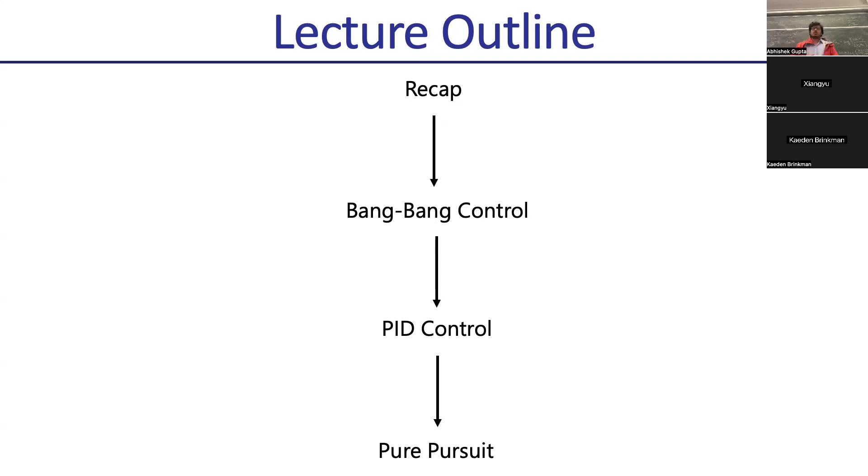Okay, so today, the way we're going to structure our class: we're going to recap a little bit on what feedback control is. We're going to study this paradigm called bang-bang control, then we're going to do PID control, and then we're going to touch on a method called pure pursuit, or we'll see how far we get. The idea is to instantiate a lot of the more abstract concepts we discussed last time in methods you might actually implement. Let's start by recapping what we talked about.

So we talked about this sense, plan, act paradigm. In control, we're going to assume that you know where the robot is, so you've done state estimation or Bayesian filtering to figure out where the robot is. You're going to assume that a planner is going to tell you a rough sequence of waypoints or a trajectory that you want to follow. Control is going to follow those waypoints in the presence of stochasticity, or not.

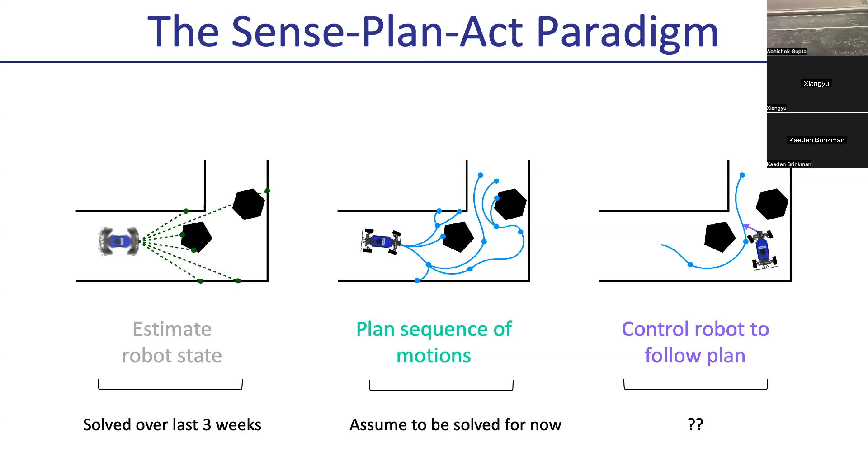The piece of the puzzle we talked about is: assuming you know where you are and you know where you want to go in the long term, how do you actually go there? How do you find the actions to go there in the presence of noise and the presence of complicated models of the world? That's the problem of control we're going to think about.

Specifically, we talked about feedback control, and we talked about how when you run open loop trajectories, you can have compounding error. You can drift from the path that you desired because the models are wrong, and you have unmodeled effects in the environment.

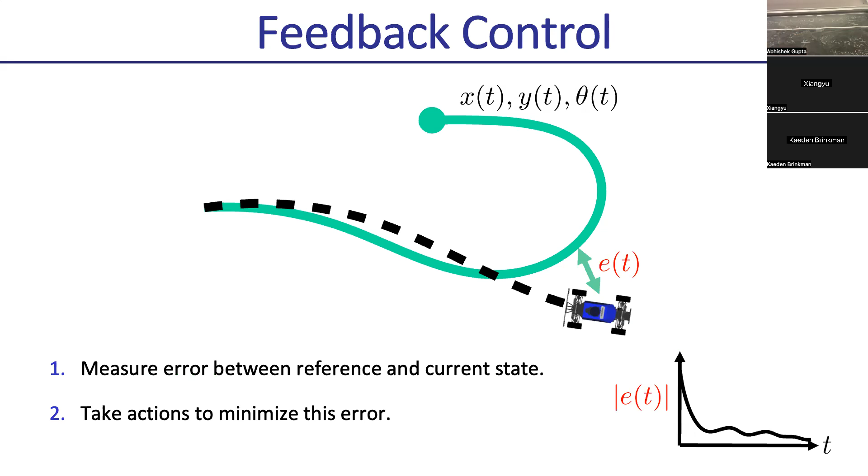So you typically want to measure the error between your robot and your desired position and try to minimize that error. We talked about how we can choose things like reference states on the trajectory that you want to get back to, computing error to the reference state.

Then we discussed how we can instantiate the control problem as trying to take your current position, the error to where you want to go to, and trying to figure out what actions to take on the system. For instance, for a race car, your action might be the steering angle or the velocity, and that's going to help you correct for these errors in closed loop.

So the steps of doing feedback control are: first, get a reference path or trajectory from planning. Then, once you're executing things in real time, pick a reference state from the trajectory where you want to get back to, given where you are right now.

Try to compute the difference between where you are and where you want to go to, and then compute what we call a control law given your current state and where you want to go. You start with step one, and then you repeat steps 2, 3, 4 in a loop while you're still trying to accomplish your task. Make sense?

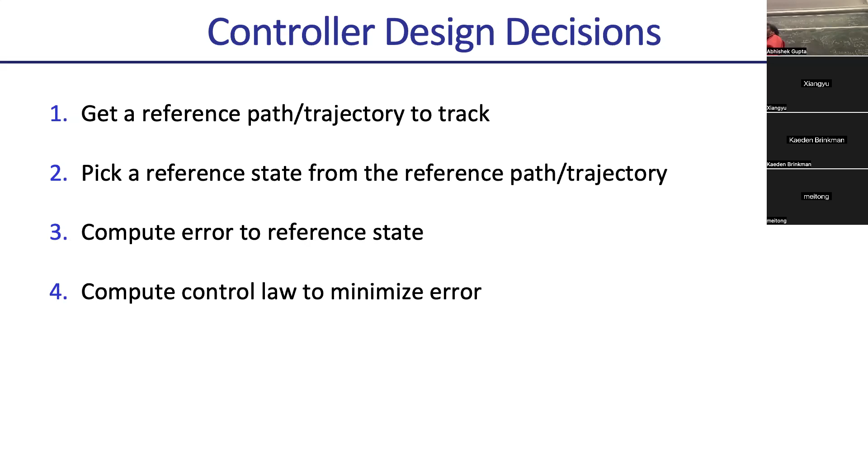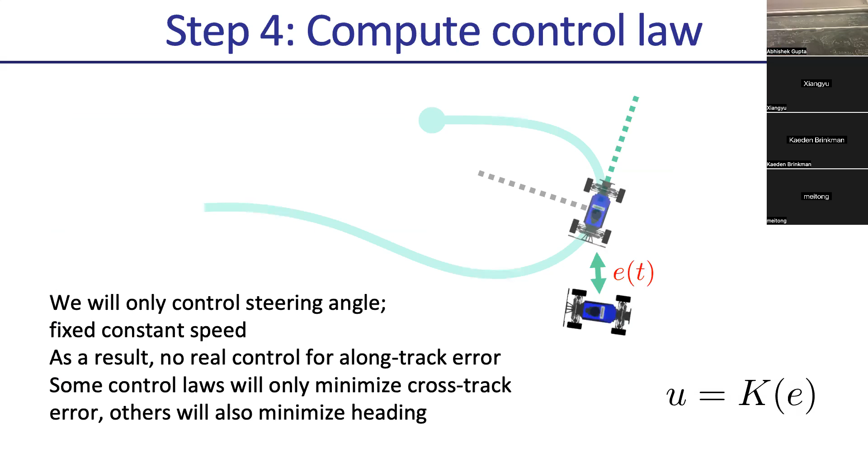Okay, so we talked about how we can instantiate this error in some frame of reference, so we can get into the right frame of reference. But the important bit we're going to discuss today is: how do we compute control laws? Given your current state and your error to your desired state, how do you decide what control or what action to take?

The choice of action is up to you as the designer of your system. It can be a speed, an acceleration, whatever you would like. But in pretty much most of these cases, we're going to try and design what this function K is going to be, which takes in your state, takes in your error, and gives you control. So the discussion today is just going to be on designing a rule for the state, which takes in a state, takes in an error, and decides the control. That's it.

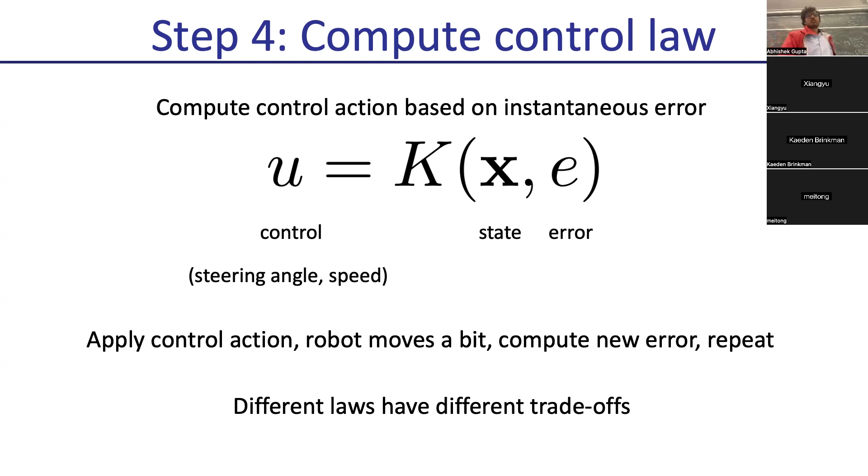We're going to cover 3 different methods today. We'll cover a much more complicated method on Wednesday. But each of these methods have different trade-offs, so don't blindly follow one versus the other. So specifically, we're going to cover these types of methods. Bang-bang control is silly, so I haven't included it here, but PID control and pure pursuit is what we'll cover today. Next class we'll cover LQR, and the class after that, MPC. But they're all just different ways to instantiate this general formula of taking your state and your error and producing a control. They're all just different cases.

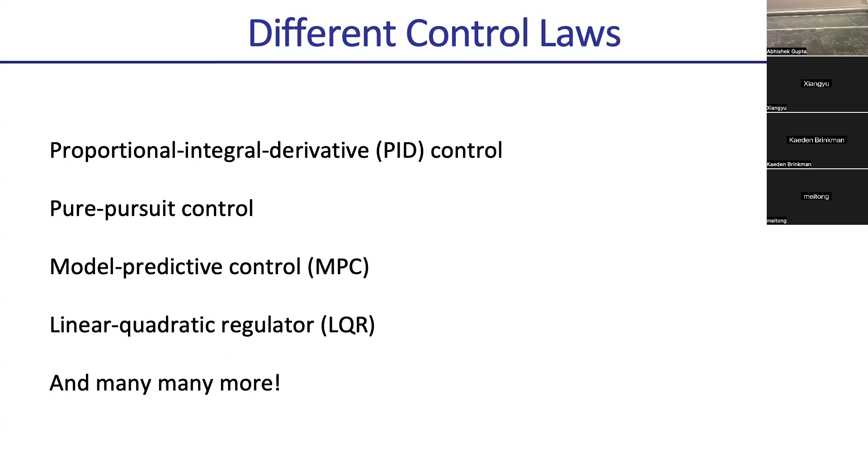Everyone on the same page for what we want to do with it? Great. Okay, so let's start by thinking about bang-bang control. Let's say we're doing path following and you computed the error and the reference path like we talked about last time. What is the stupidest possible thing you can do? You're following a path and you drifted off the path, and let's say the control is just steering and you're just choosing a steering. What is the silliest thing? Steer backwards, steer back towards the path.

That's all that bang-bang control is. It's just saying that you choose between hard left and hard right. So if you're to the left, then you go right, and if you're to the right, then you go left. Essentially, the reason it's called bang-bang is because you choose actions at the limits of your action range. So your control profile is: if your error is high positive, your control law is going to be the maximum negative. And if your error is high negative, then your control law is going to be high positive. So you just go bang between the two ends of your spectrum, and the control law is just going to be like that. It's the silliest possible K that you could have.

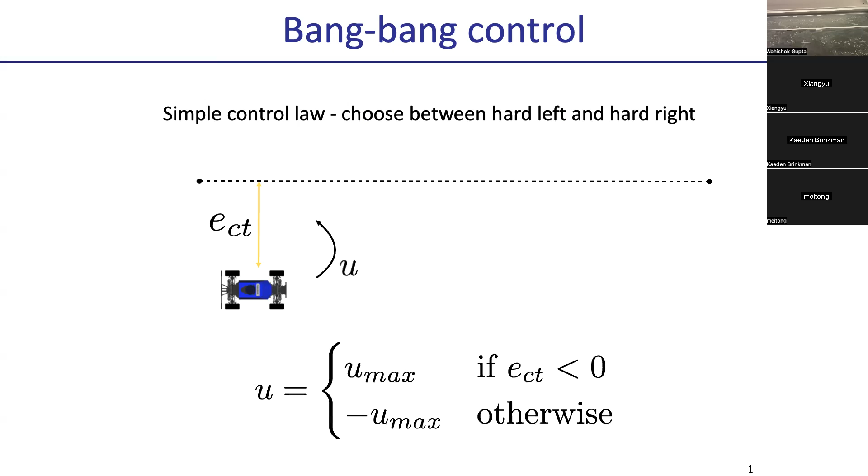Okay, so this seems dumb. So in what situations might this be good? Like when might you want to use this? If you're going right at something - right, but even then you might have drift. So imagine you're going right at something, you drifted off, and now you're aligned. If something comes in front of you - right, yeah, that could be one.

Another is if your system is relatively able to correct pretty fast in the loop, then it's going to be fine. But if you're going pretty slow, you'll drift off too far and then come back, and then you have like a kind of winding thing. So when you're doing high frequency control, it's okay, but if you're doing low frequency control, that's kind of a problem.

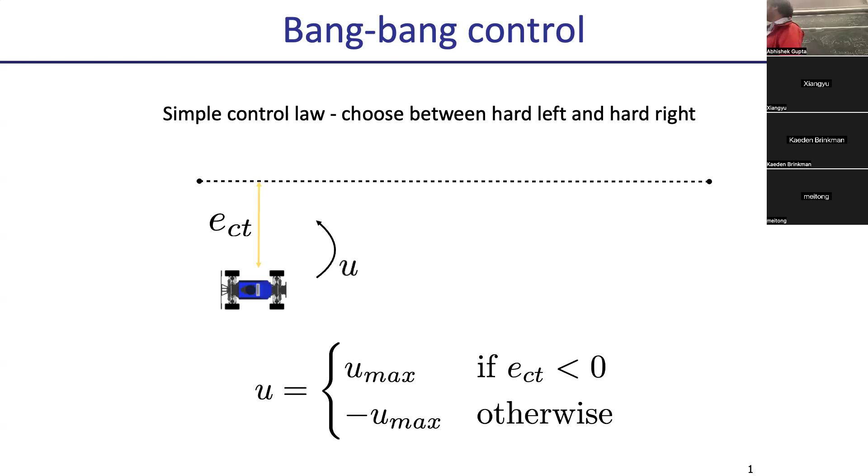But if you're doing high frequency control and you're doing bang, what could happen to your system? Physically, you have a physical system and you're doing bang control - why might that not be a great idea? Yeah, you're constantly flipping your motors one way versus the other, and that might damage your hardware. So generally, bang control is a bad idea, and more formally, you can show that these bang controllers are not necessarily guaranteed to ever converge. Basically, you've gone too far, and then you apply control and you go too far this way, and you apply control and you go too far this way. And so your system is not stable, as in you never converge to zero - your error never converges to zero.

And so if it's okay to do that, it's okay to wind your way around the path, and it's fine. But in most systems, you don't want your helicopter doing daisy chains around the path. If you're using this in a car and you're making a hard turn to correct something, right.

Okay, so bang-bang control is the silliest thing you could do. You all should implement it on the car. You'll see how silly it is. And then you'll do a better method, right?

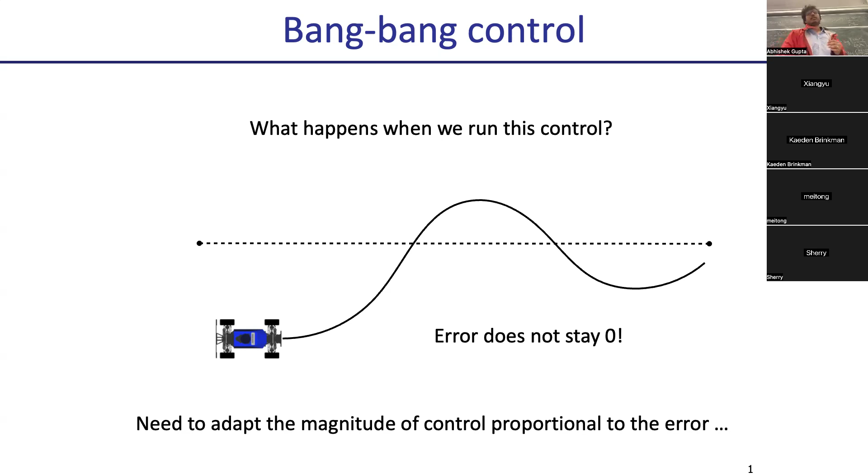And so that's really the idea behind our next method, which is PID control. So how many people have heard of PID control? Good, around half. But let's go over it in some detail, and we'll see when it works and when it doesn't work.

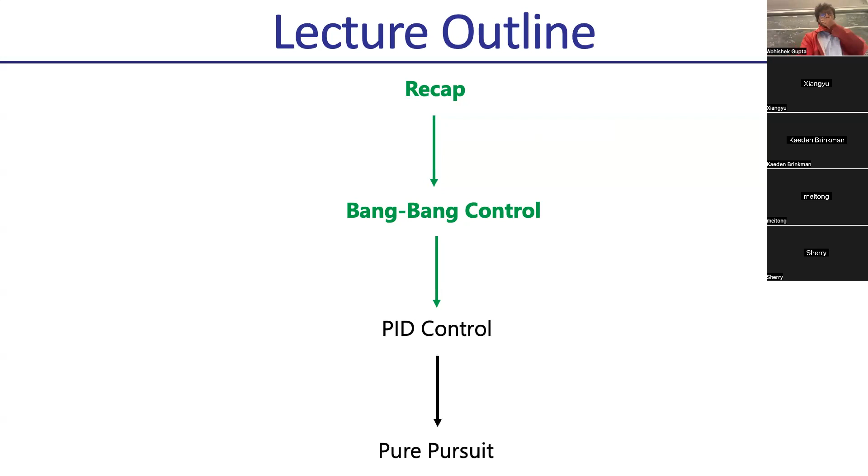PID control was introduced quite a while ago, not in the context of robotics, but in industrial chemical plant control and so on. When you want to keep your chemical process around a particular value, you often use things like PID control. If you want to do things with the humanoid, don't use PID control - it's going to break your humanoid. So then you want to use some of the more sophisticated methods we'll talk about next.

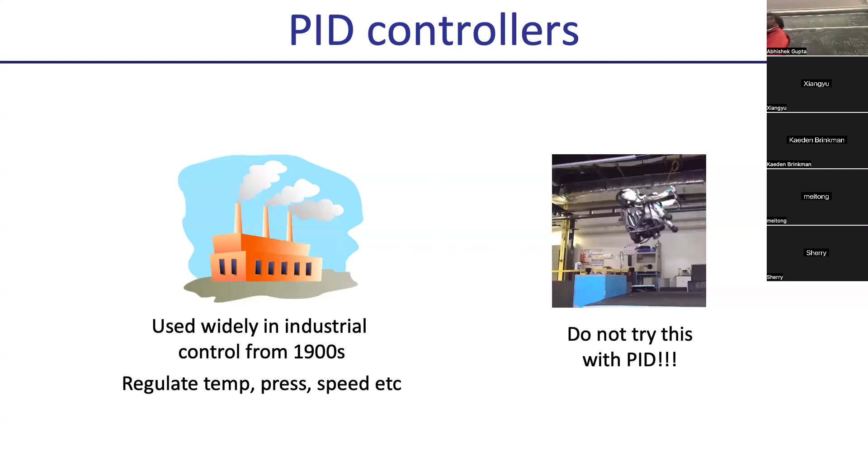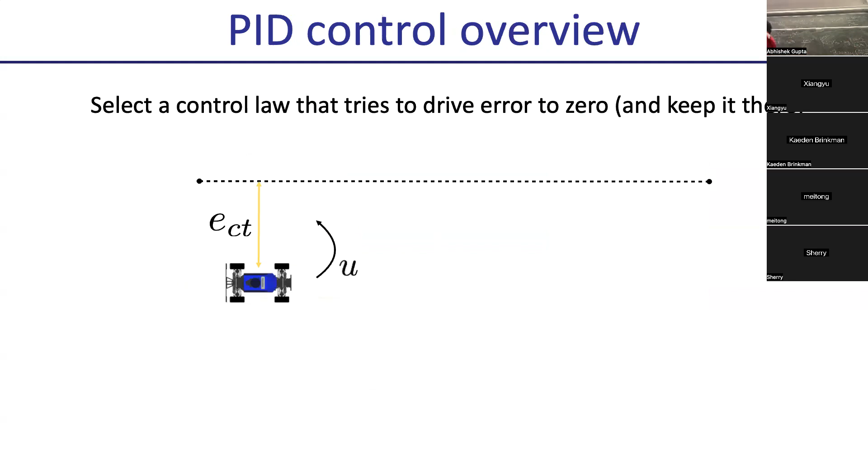But the idea of PID control is that you want to pick a control law that is stable, so it sends your error to zero and keeps it there. The intuition is the same as before: you want to provide control that is proportional to the amount of error. And so the form of a PID control law looks something like this.

Let's say your error is error CT. We're only going to measure cross-track error, not change velocity, just steering angle for the car. So it's going to be a combination of three different terms: one term which is just a proportional factor on the error, so Kp times the error; one term proportional to the integral of the error; and one term proportional to the derivative of the error.

The reason it's called a PID controller is because you have three different terms: the proportional term, representing the present; the integral term, representing the past; and the derivative term, representing the future. Intuitively, the error is what is the error right now, the integral of the error is what has the error been historically, and the derivative of the error is measuring how the error is changing, trying to predict the error in the future.

So to do a full PID controller, you often want to combine this proportional term, this integral term, and this derivative term. Any point where the derivative is negative? Yep, the derivative could be negative. All of these can be negative - they're not sign restricted because you might want to go one way versus the other. So it's usually some combination of these.

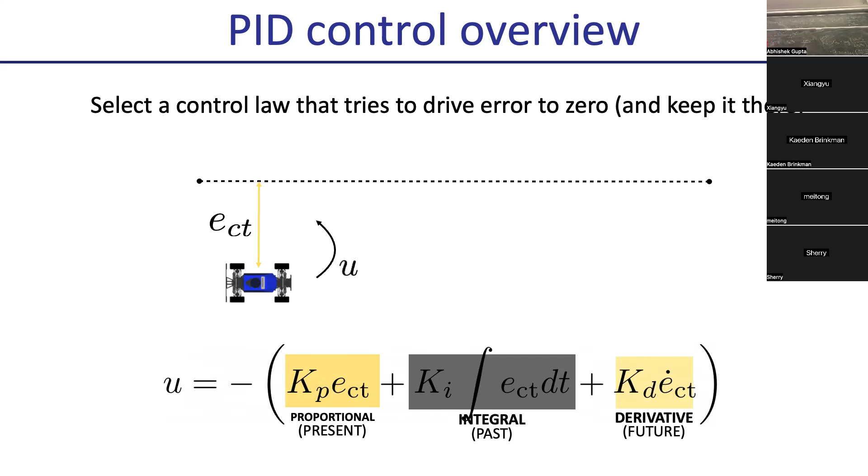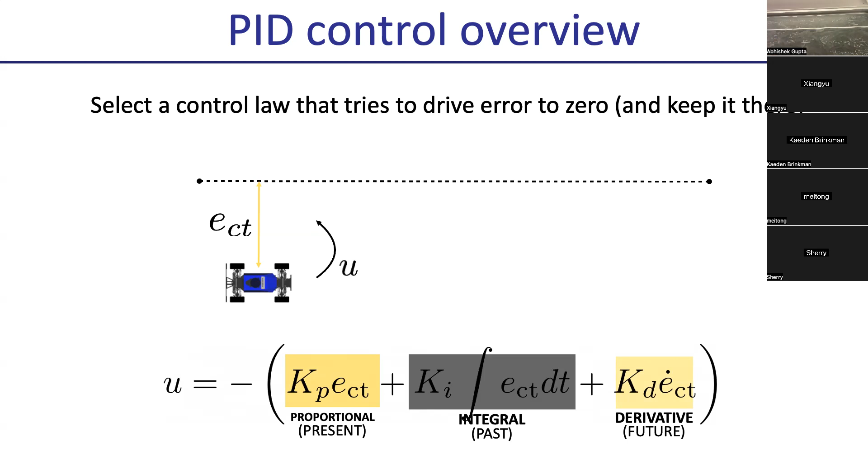These terms we have here, Kp, Ki, and Kd, are what you'd call gains. These gains basically determine how much we care about the current error versus the integral versus the derivative. Often they're chosen differently for different systems and for what problems you want to solve. We'll talk about how to tune them, but the intuitive idea is you want a control law that combines the error, the integral of the error, and the derivative linearly. You can think of this as intuitively implementing three pieces of intuition.

The first is the proportional controller, which says all you want to do is take an action to minimize the current error. So imagine your error was high, your action is going to be high - it's proportional. And your gains are going to be positive, so if you drifted a lot to the left, you're going to take a large action.

Your action is proportional to your error. What the integral term says isn't immediately intuitive - it's saying if you're accumulating error, your integral keeps increasing. If your error goes to zero, your integral stops increasing. But if your error is still accumulating, your integral keeps growing, and that means try harder. Imagine you'd almost solved your problem, gotten pretty close, but weren't finishing the last bit - the integral keeps building up and says you're not quite getting there, try harder.

And the derivative term is saying you're going too fast - your system's going to oscillate too much, so let's slow down. Essentially you can think of this as applying the brakes, like applying acceleration towards zero error. And the integral is like giving you the last bit of juice to reduce that error to zero. So intuitively, those are the three terms and why they matter, and we'll cover each of them.

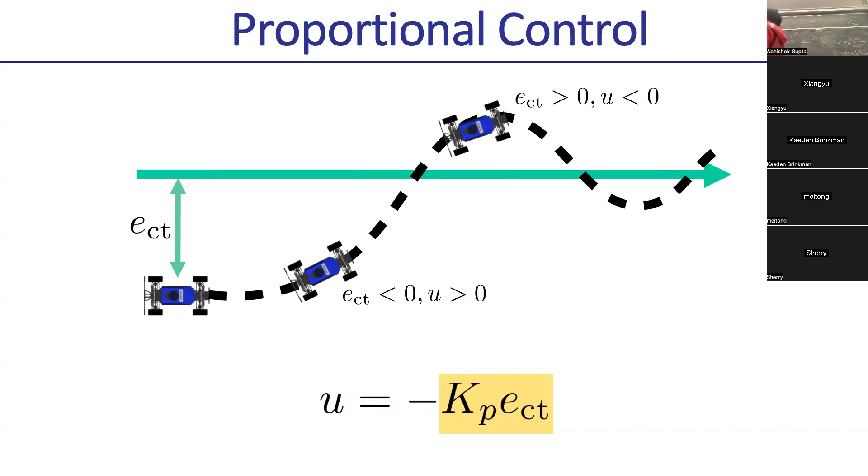If you overshoot the zero steady state, the error has become positive, which means the action becomes negative. When I say error, I don't mean absolute error, you have to take directional error. So just take the difference between where you are and where you want to be. Your error is now positive, which means the action is negative, so it's going to send you back towards the middle. Then you're going to be sent back towards the middle again, and that's going to repeat until you hopefully converge.

It's different because you're scaling the amount of action that you are taking according to the magnitude of the error. Whereas in Bang Bang, if your error was negative, you max out, and if your error is positive, you max out the other way. This is important because this thing will reduce the amount of control that you have when you're close, whereas in Bang Bang, you still apply the maximum possible action. And so that won't converge.

Okay, so let's try to understand what happens with this controller a little more carefully. What happens when the gain is pretty low, when KP is pretty small? We have this control law KP, let's think about what happens when KP is set to be pretty small. That should be a small action. It's going to take a small action, which means it's going to try to converge to the steady state pretty slowly. So it's going to go pretty slowly towards the steady state, and the controller is going to be pretty loose, and you're not really going to track the positions you want to track, because you're going slowly.

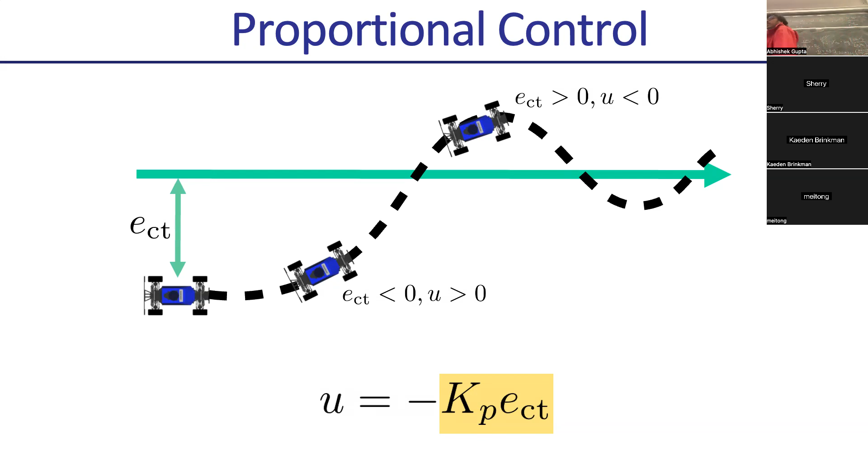But I think it's not really that important to get that detail right as much as it is the intuition, which is: if the gain is low, you go super slow, and if the gain is high, you start oscillating. So you want to stay somewhere in between.

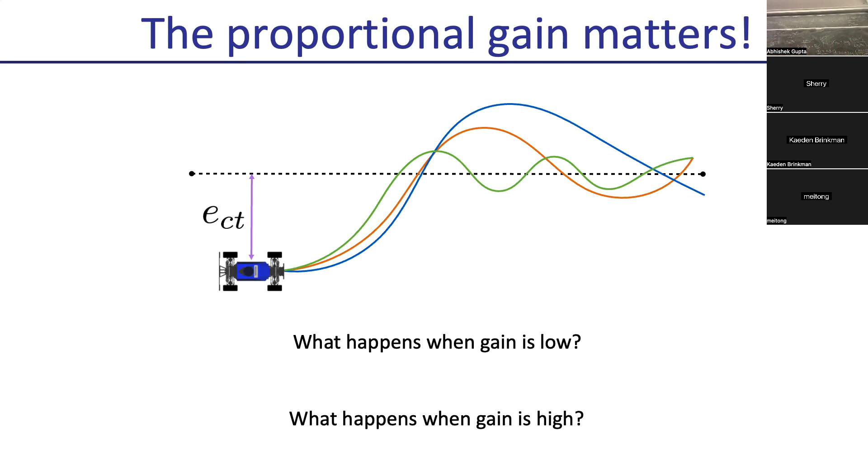Okay, so that is the P term, right? And if the gain is really high, you start having this chase-your-tail type behavior. You overshoot and you overshoot and you overshoot. So if you're playing with the race car, try increasing the gain a lot. You'll see that it basically behaves kind of like bang-bang control. Usually this makes sense, but if your KP is too big, it's almost like you max out your control no matter what, right? So it passes a sanity check.

Is there, even if the gain is really high, is it still guaranteed to converge eventually? It just will take a really long time. Not for all cases, I believe.

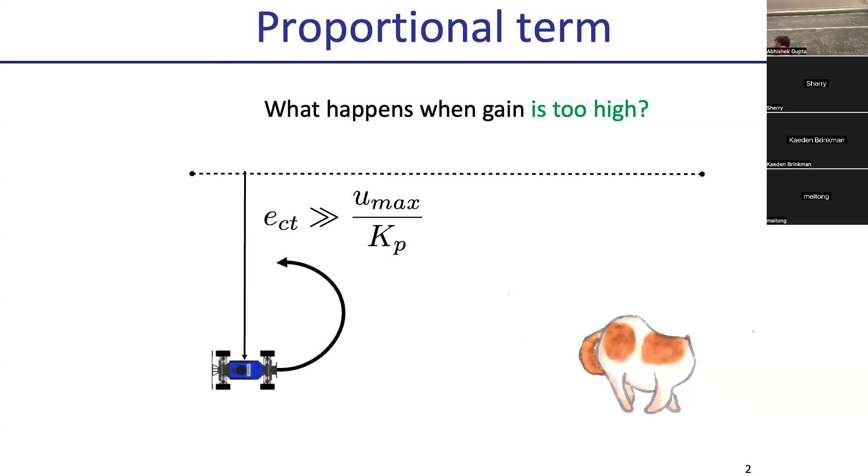Okay, so we've talked about proportional control. Proportional control is great when you have a system that's drifting off because of some noise. But imagine you're in a situation where there's wind blowing against your car, and it's a constant wind that's blowing against your car, and the wind is not under the control of your system. So if you have a system where there's wind and you keep applying just the P controller, at some point the wind and the controller are just going to balance, right? You'll see that the system doesn't actually converge to zero. So if the wind is not under your control, at some point there's a steady state offset. The wind and the controller will balance and you'll end up somewhere here, and the controller is not going to go to zero.

And that's when you want the integral control. So basically what the integral control is going to say is that if you have some amount of accumulating error - imagine that your wind and your error balanced out and you were close to zero, but you really want to set that steady state error to zero, you want to converge to the point you want. What's going to happen if you have an integral term? This is going to be the integral from 0 to t, your current time step. If your error is not zero, this term only stops growing if your error is 0, because otherwise there's still something being added. So if your error is not 0, this term will keep growing. Your steady state error is not 0, so I'm going to keep increasing how much action I apply to this term till I send it back to 0, because that's the only place this will stop growing. So it's saying if the wind and proportional control balance each other out, then the integral is going to keep growing until you send the steady state to 0. And when the steady state is 0, this integral no longer keeps growing. Imagine you reach 0, the error is now 0, so the integral stays fixed.

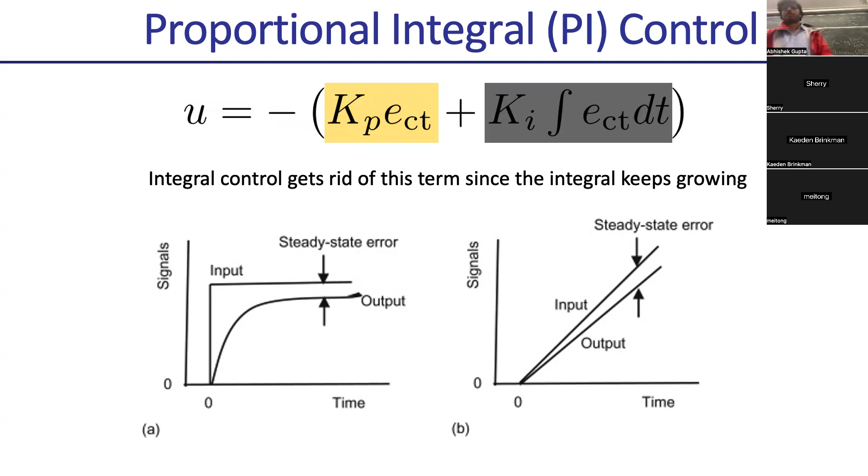Okay, do we buy this? So that is PI control, right? And the next one is derivative control.

You can think of this intuitively as it's penalizing the derivative. So it's saying that if your E dot is super high, then penalize control. And what that means is that if you're changing too fast, like swerving too hard, slow it down, it's just saying apply the brakes.

So the derivative term is just saying if your gradient is too high... imagine that you were here, your KP term was really high, so you're applying a huge action, which means your derivative E dot is going to be pretty large. All that this KD term is going to do is slow you down, apply the brakes.

When we talked about the proportional controller just oscillating and so on, you can think of this derivative term like a damping term. You have a spring, it's like a damping term. So you can almost think of the proportional controller like a spring and the derivative controller like a damper.

If you have a spring damper, it's literally the same equation, it's literally a damper on the spring. So what it's going to do is ensure that you don't keep oscillating, but you slow down, you don't change too fast, and you converge to the steady state, because oscillations are never good for a system.

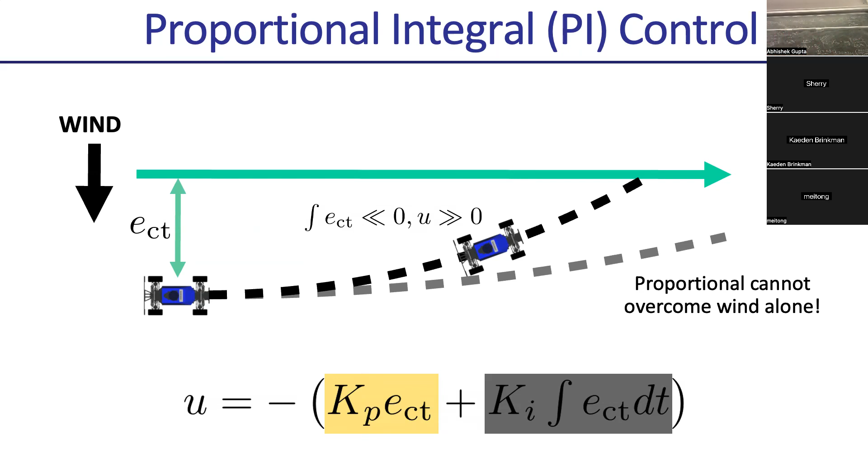So we talked about the integral controller and said, okay, we can implement it by discretizing time and summing things up over discretized time. But how do you implement your derivative controller? You have to get this. The law is basically, you know how to get error, right? Because we talked about how to take the difference between where you are and where you want to be. Let me give you this, this is subtraction.

How do you compute E dot? Like what is E dot? And I made up this term, how do you compute the error dot?

You can just look at the previous points, like average or change, or go back two points to get even more accurate results. Exactly, so you can use numerical differentiation or finite differences. You look at the current value of error, look at the previous value of error, and take the difference between them, then divide by the time step. That's going to give you the gradient. You want the time step small enough that it's accurate, but that can give you an approximation to E dot. So that's one way of doing it.

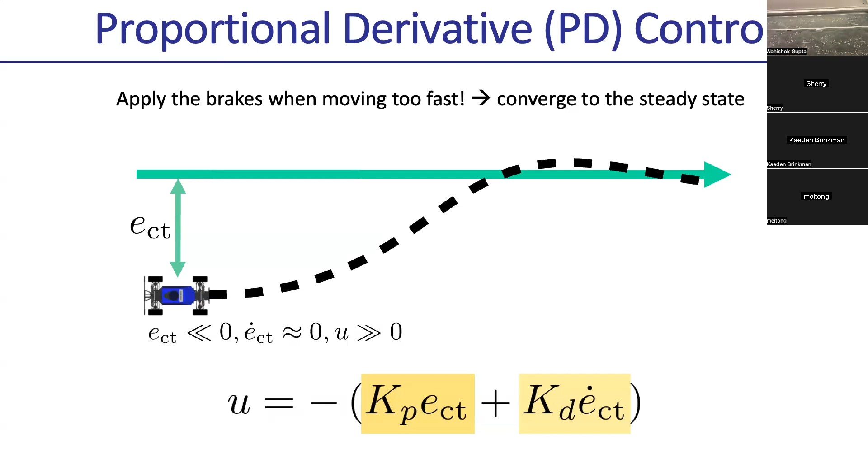But that's the thing about numerically differentiating the error. Now, why is this a bad idea? If you have noisy input, you accumulate error.

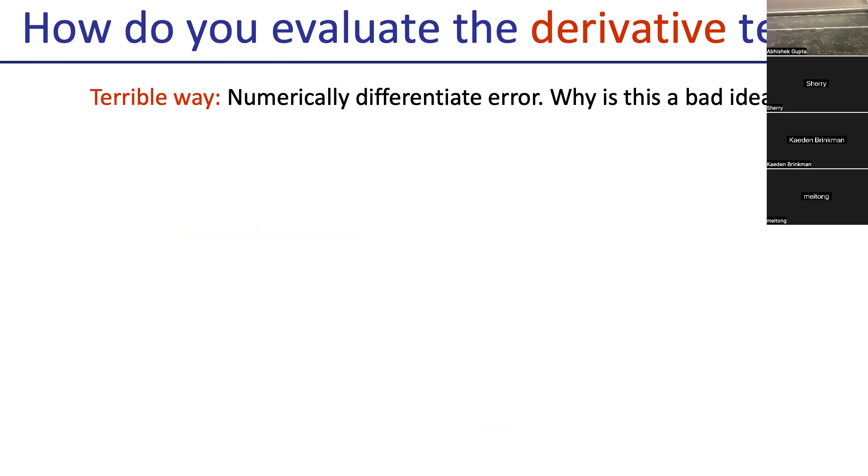So instead, in this particular system, you can actually compute the analytical derivative. For instance, you have E, the difference between X and X ref and Y and Y ref, projected into the right frame of reference, the same thing we did last class. You can just take the derivative of this thing with respect to time and write it out in closed form. This isn't true for every system, but in this particular example, you can compute the derivative of the error with respect to time, and this doesn't have numerical issues because it's a closed form thing.

If you know the difference between where you are and where you want to be, and you know the velocity, then you know what the change in error might be. So you can compute that E dot term that way without having to do it numerically. But if you didn't know the system equations this way, or how to take derivatives of them, you can always do it numerically, but that's more prone to noise issues. So if you can use system structure, you always should. If you don't have the system, then obviously you just do it numerically. Does that make sense?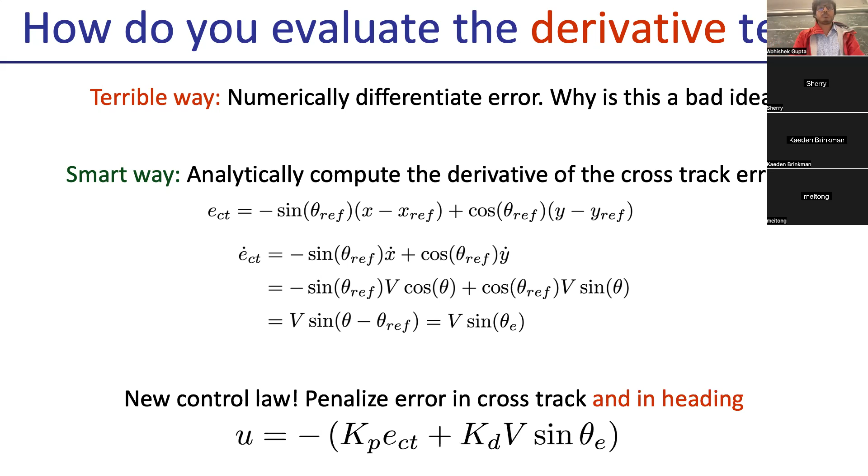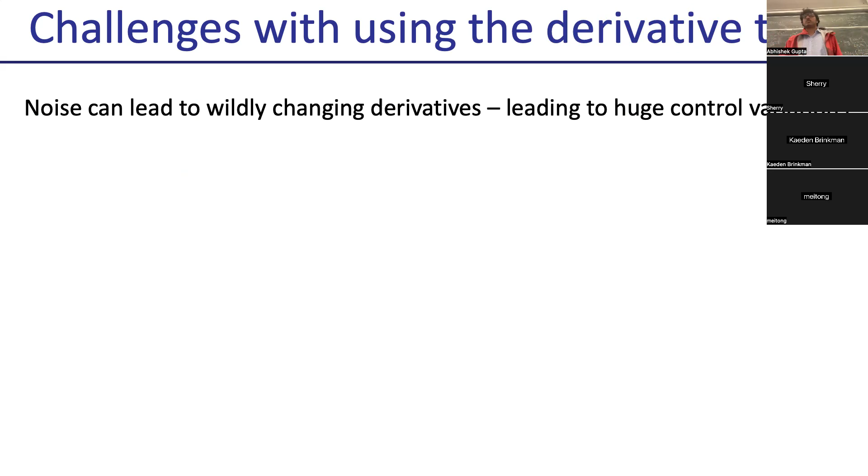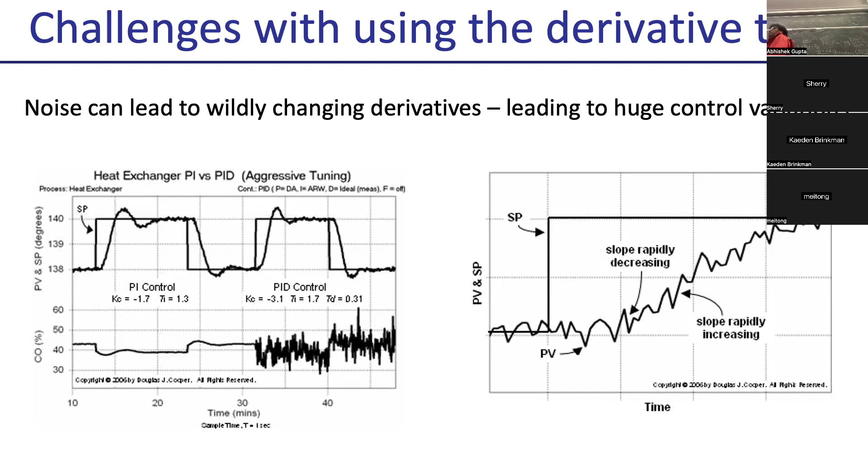We follow that? So kind of putting the pieces back together, we have this PID controller, which is a combination of the proportional term, the difference between the current and the reference; the integral term, a sum over all the past errors; and the derivative term, trying to predict the future by seeing the rate of change of the errors. So the proportional term is trying to bring you back to the middle, the integral is dealing with steady state, and the derivative term is trying to slow down or put the brakes on your system so you don't oscillate.

Okay, so that's the PID controller, super simple. Do we buy that? Will we implement it tomorrow?

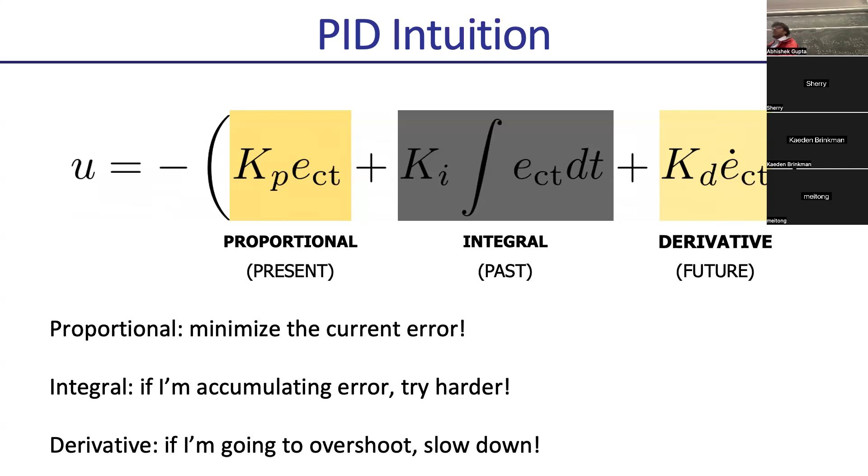So the nice thing about the PID controller is that it's very much system agnostic. Nowhere here have I used the system. I define this motion model, this car model and sensor model and all this fancy stuff, and then I use this dumb as hell law to do everything. There's no, it's just proportionality on error. Maybe the only place I use the model was to compute the derivatives, but you can even do that numerically, so nowhere in this whole system did I use the model at all. That's why people love to use PID because it's so easy and so system agnostic that you can use it anywhere. And it works surprisingly well.

One thing we've alluded to but haven't really described is what are KP, KI, and KD. We've talked about the effect of KP, the effect of KI, and the effect of KD, but how do you fix them? If I write a PID controller, how do I fix them?

Any ideas? Start with one and then tune the next. That's pretty much what we do. But the tricky part is that there's interactions between the terms and you might not get the global optimum. But often methods for doing this empirically do something of that nature.

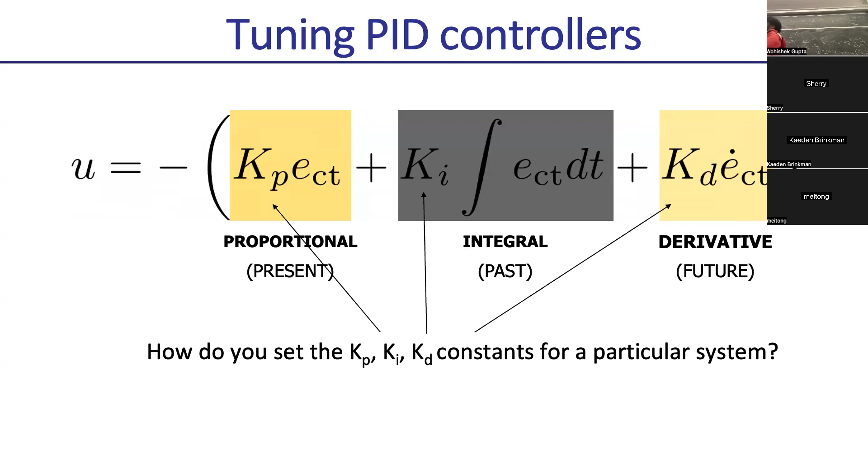So one of the popular methods is called the Ziegler-Nichols method. This is kind of the flow chart of what they do, but intuitively you can think of it this way: set the Ki and Kd terms to 0, and then just try to increase the Kp term slowly. So try to increase the proportionality term slowly. We said when it's low, it's going to converge slowly, and when it's too high, it's going to oscillate a lot and potentially become unstable. So what you want to do is increase it slowly until you get to a steady state oscillation - the oscillation that repeats and doesn't grow in magnitude.

When you get the steady state oscillation, you can measure the period of oscillation, and what K you had to get there. Then they try to run a bunch of systems and they have rules to pick KP, KI, and KD from the period of oscillation and the value of K. So you first use the P controller to almost probe the system to figure out how it oscillates, how it accumulates. Then according to that, you can pick the Ki and Kd. There's literally a table - you run it till you get the steady state, then given that, you just plug the numbers into your table and you get your Ki and Kd. This is a very empirical method. I don't know if there's any theoretical justification for it, but it seems to work pretty well.

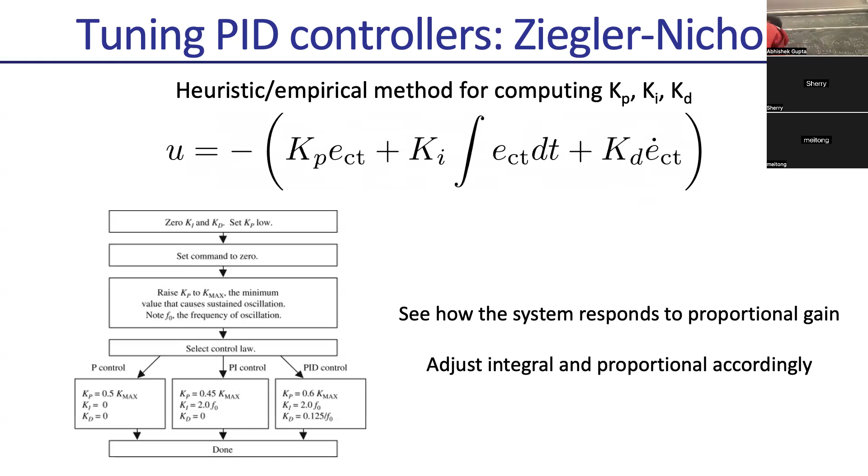But that's the general idea of PD control, or PID control. We've gone from our problem of feedback control. We've said bang-bang control just applies maximum control opposite the direction of error. And PID control tries to do it in a proportional way, while also accounting for accumulating error and overall oscillation. So P, I, and D is trying to get you back proportional to the error. I is accumulating error, and D is trying to not make it oscillate. So that's PID control. Any questions? No? Feel pretty good about it?

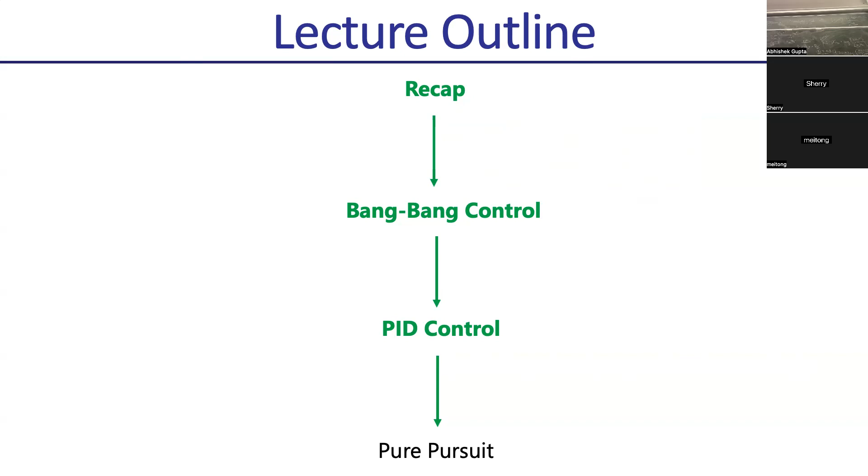Great, so the next thing we're going to think about is this idea called pure pursuit. Pure pursuit is like intuitively you can think of it as you're just chasing a carrot. Your car is chasing a carrot further along the path always, and you're going to try and compute a control law which is always chasing a carrot. So imagine if you had two fighter planes chasing each other - you're always trying to compute the arc which lets you keep chasing the other one. And so the idea of pure pursuit is just trying to use the model of the system in order to compute how to keep chasing the carrot.

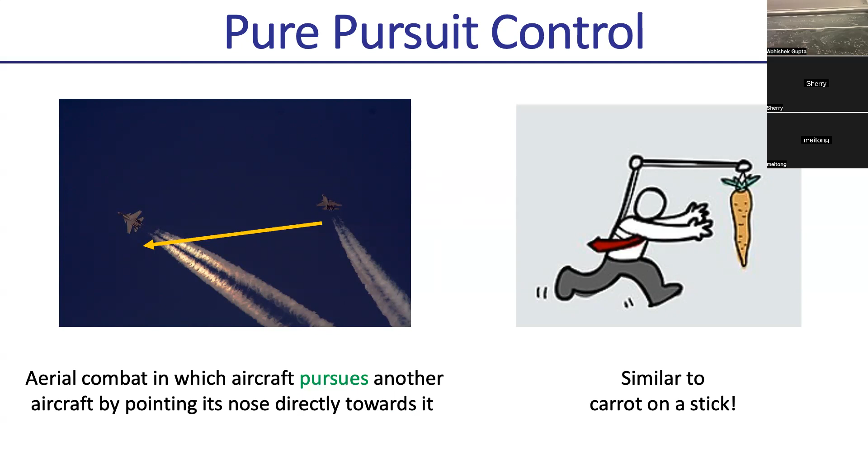So let's look at this a little more closely. We've defined this model for our car, and we've written out all these equations, but our PID controller didn't use the model at all. It didn't use all the structure you have in your system.

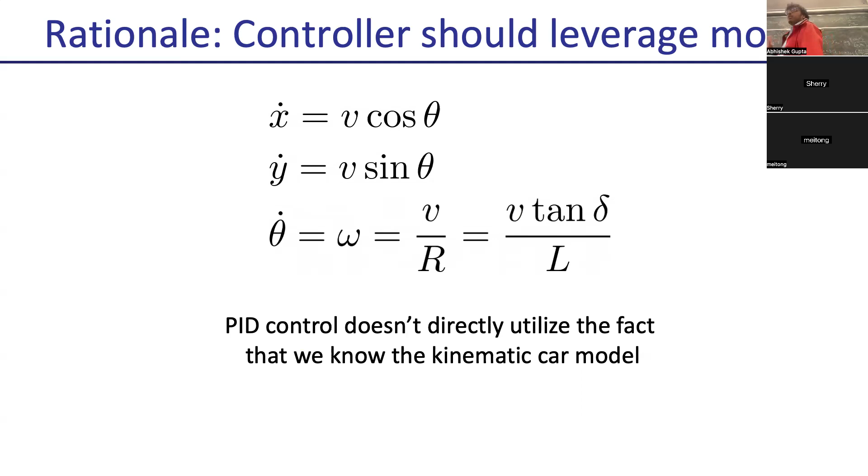What pure pursuit tries to do, rather than just compensate for error which is very reactive, is look ahead and plan. It says, given this model of the system and where I want to go in the future, can I compute actions that take me to somewhere else using the model of the system? The difference between PID and pure pursuit is that PID doesn't use the model of the system anywhere, while pure pursuit tries to use the model to chase this carrot. It'll become more clear when I show you a picture, but that's the basic difference - you're trying to use the system where you can.

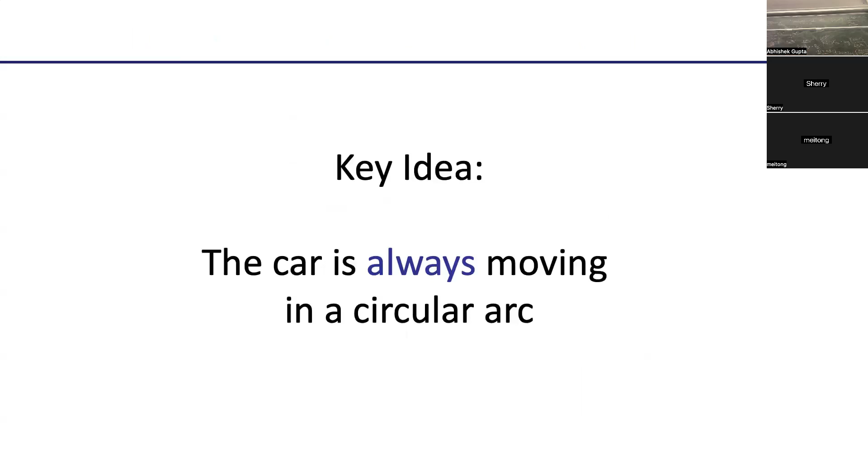The key idea in pure pursuit is that the car is always moving in a circular arc. Remember our kinematic motion model - we said the car is always moving in an arc, with an instantaneous center of rotation, and you're always computing the arcs it's moving in. Especially with your race car doing Ackermann steering, you're always going in an arc. So we're going to use that fact to figure out what controls to take so that the arc gets to where you want it to get to.

Let's consider this setting. Your car is at some position X, Y, with some heading. You want it to get to some position in the future, X ref and Y ref, such that the distance between them is L - some point on your reference trajectory in the future. Since we're only controlling the steering, what we want to solve for is what steering angle will make sure the arc of the car gets it to that point, X ref, Y ref.

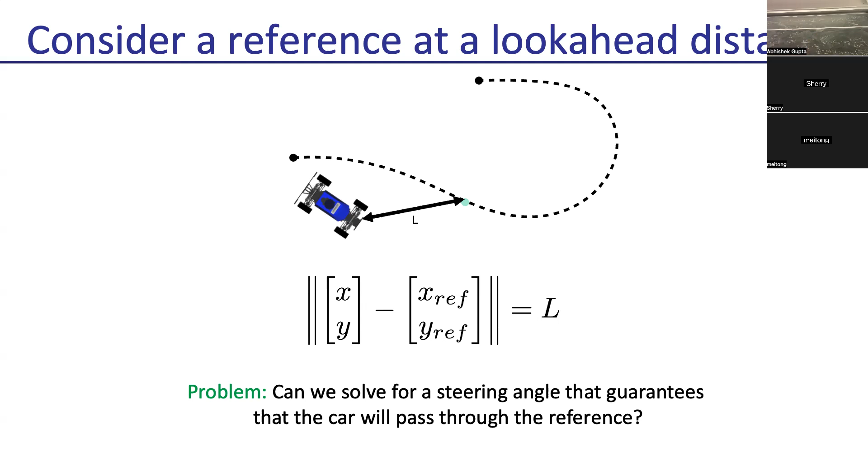So we always want to solve for an arc that passes through a look ahead point. The important thing is that this point is not stationary - it keeps moving. You start here, choose a reference point, compute a point along the arc. Now you move somewhere else, and you'll choose a new reference point further along to compute a point on the arc. As you keep moving, the reference point you want to get to keeps moving further and further ahead. So you keep running this process of finding the steering angle that gets you to your reference point, in a loop: compute the steering angle, take a step, reselect a reference point, recompute the steering angle, take a step, repeat.

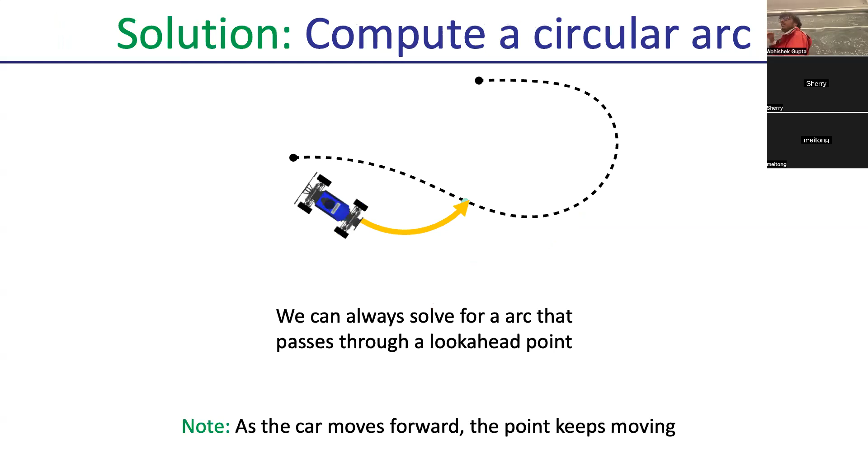So the process is: find a look ahead point, compute an arc, take an action in the world. The world transitions to a new point - repeat: find a new look ahead point, recompute the arc that gets you there, take an action, and keep going. The reason to do this is so we don't get this jerky behavior of getting here, getting here, getting here - instead you smoothly keep going along your path.